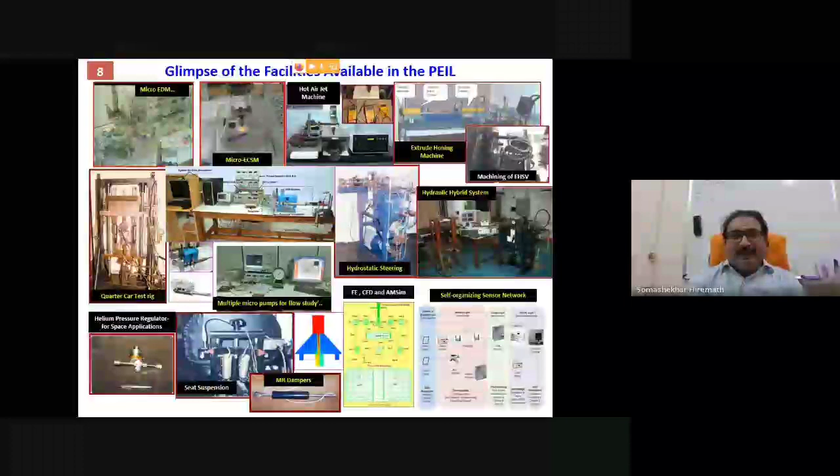All are developed in-house to do various machining processes, like the micro-EDM setup used for generating micro holes, channels, textures, and many things, including nanoparticles. These are all our patented work, friends. Everything I am showing is our patented work, developed in our laboratory to do the various work.

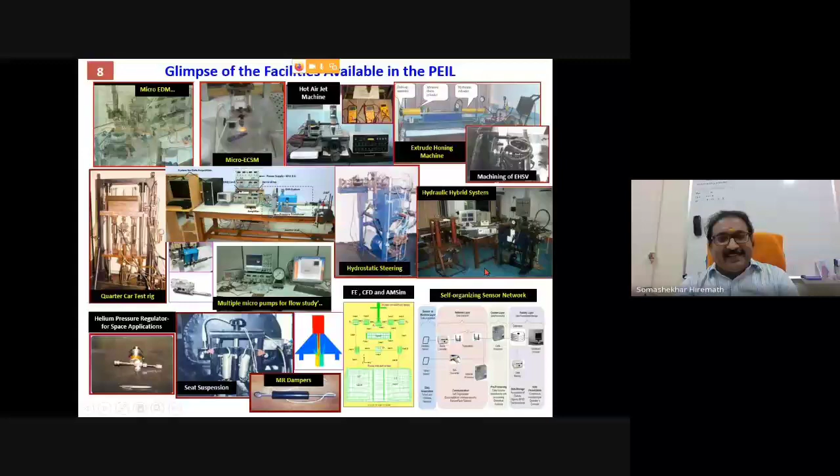Then I will concentrate quickly on the R&D facilities available in our laboratory. The first self-guided vehicle, HARINI, is developed in our laboratory and used for various exploration purposes.

Now, for the past 4-5 years, we have been working on the parallel manipulator also. This is a joint which can mount the table in any direction. This is a patented work - only the joints are patented.

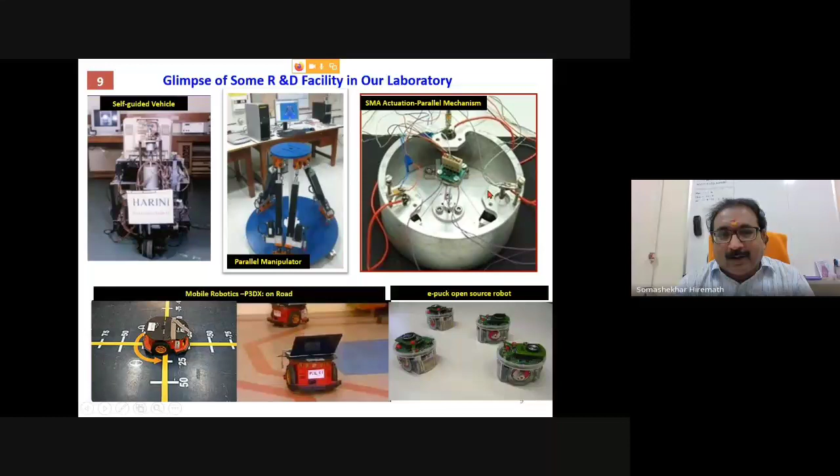All these are the actuators. I'll show you the animation later at the end of the presentation. The same parallel manipulator is replaced with what we call SMA actuated wires, placed in all 6 locations. If you heat and cool these wires, the table will be mounted in different fashions.

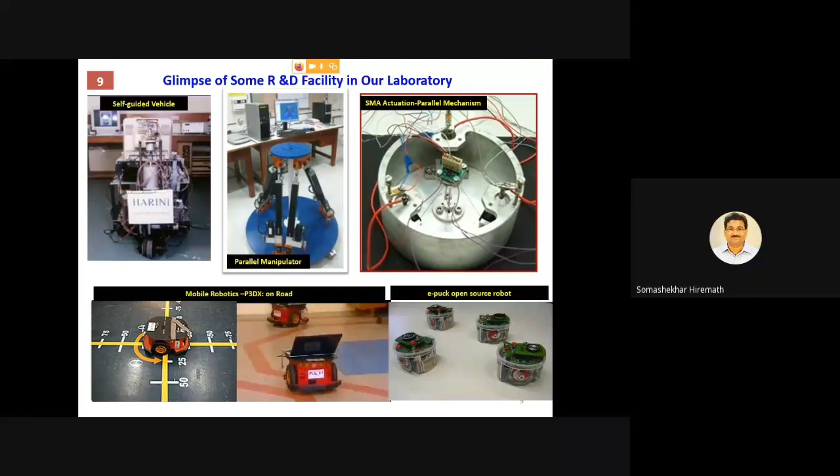The next area where we are working is mobile robotics. Here we are using the P3DX robots on road for collaborative robots, obstacle avoidance, and many applications, including very small robots like e-puck robots.

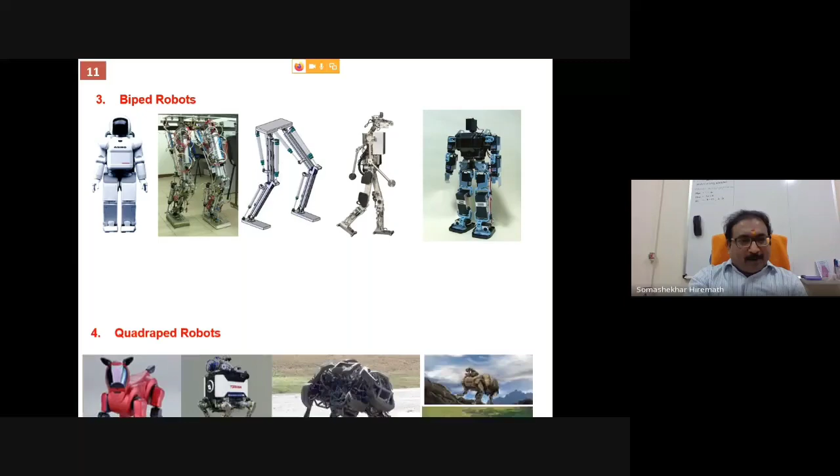There are many things available in our laboratory to carry out research work. Khepera robots, Pioneer robots, biped robots, quadruped robots, and hexapod robots are some of the things available in our laboratory for research. All are programmable and reprogrammable devices used for developing a controller or any specific work.

Now, one more facility you are seeing is what I call the workspace calibration test facility, only available in a technical institution at IIT Madras. This is an 80 lakh project, friends, where we are calibrating industrial robots, medical robots, and mobile robots.

This is a FARO laser tracker. It will emit the laser and you will see the laser rays. This will be traced by the retroreflectors. A small ball is there, and different types of balls are available here. This is called a retroreflector, which you attach to the industrial manipulator or medical robot you want to calibrate, to determine all the ISO parameters.

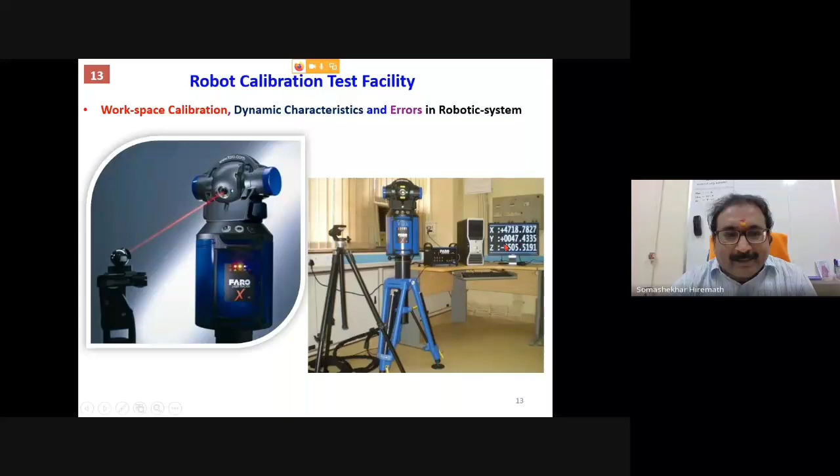I'll show you in the next slide. You will see the FARO laser is interfaced with the DynaCal software, which gives the accuracy in X direction, Y direction, Z direction, theta X, theta Y, theta Z - all the parameters you are able to calibrate and use for various purposes. We calibrate parameters like positional accuracy, positional repeatability, and distance accuracy, as specified in ISO 9283/1998.

All these are online measurements using the software, which also follows the ISO parameters. We do online measurement and offline measurements, many things using this on the industrial robot. I'll show you how we are calibrating the robots at the end of my presentation.

Now we'll see some glimpses of the robotics work we did last year. First and foremost, what we are working on is trajectory tracking. It is so accurate, giving 2 or 3 decimal accuracy to trace circular, triangular, rectangular, or any known trajectory. You will see we are doing simulation as well as experimentation using differential drive robots, the P3DX robots.

In this work, we are using a very small one - a 1.2 lakh differential drive robot, programmable and reprogrammable, controlled through Wi-Fi with no wire connection. It is used to create different trajectories using a user-friendly graphical user interface. You'll see here your task is to get various types of trajectories, which are tracked automatically using simulation in MATLAB, integrated with experimentation.

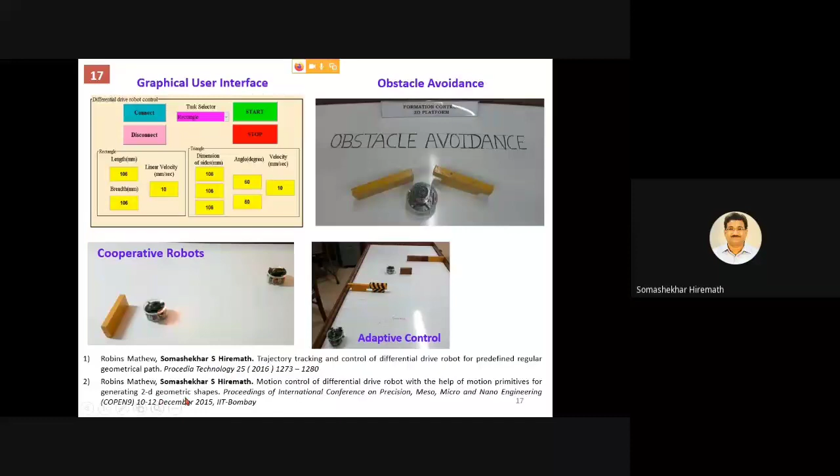Next, we are working now on the waypoint navigation system, used in aerial robotics, underwater robotics, and many other domains. The advantage of waypoint navigation is that it uses a probabilistic roadmap to generate small points, called waypoints. These waypoints are generated using the probabilistic roadmap, and then you define the initial point and final point.

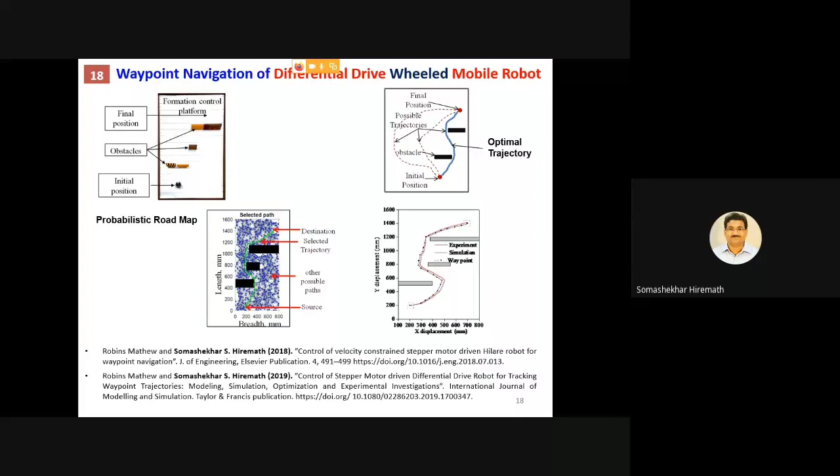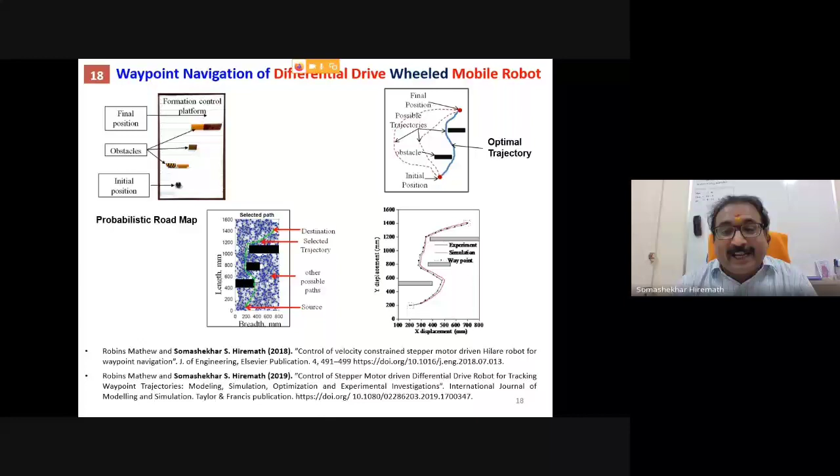The robot will try all the paths to reach the destination, avoiding the obstacles. In this waypoint navigation, our objective is to get the optimal trajectory, and then we do the experimentation. You will see the experimentation and simulation results, showing how the robot reaches the destination point with minimum time and minimum distance to achieve the target value. These results are also published in good journal papers, each about 20 to 25 pages, elaborating the complete dynamics and kinematics. Next, we are very good in developing image processing techniques.

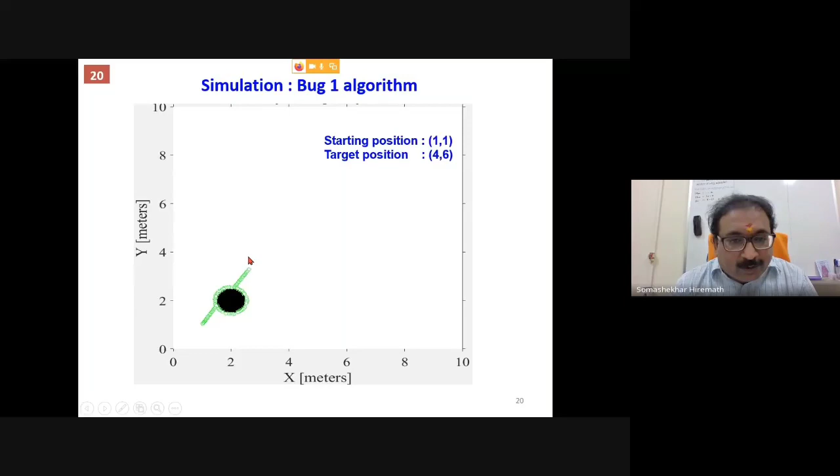At every instant of time, it calculates the distance between each point and the destination. Then what happens next? Other robots coming will not circumnavigate; they will only go toward the minimum distance to the destination.

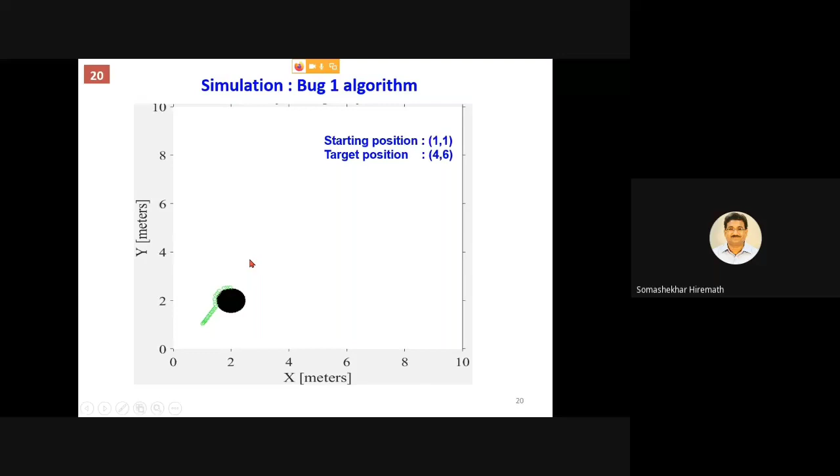For this, we use a multi-robot system. There are many robots, robot 1, robot 2, robot 3, robot 4, all placed in their original positions. Then they start moving all at a time. The robot nearest to the obstacle will circumnavigate in the clockwise direction, and another robot will move in the anti-clockwise direction.

Every time, the robots exchange data, such as how much distance remains to the destination and how much time to reach it. Then the robots exchange information and decide the minimum distance traveled to the destination, and determine the point to start from. Other robots that stopped here wait, and only two robots perform the circumnavigation.

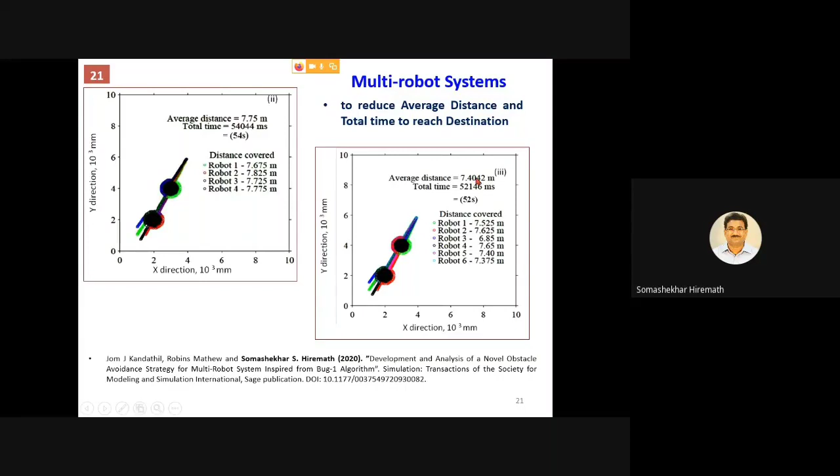Then the other robots come to that decided point and proceed. You will see that the distance traveled and total time taken decreases as the number of robots increases. The objective is to reduce the average distance and the total time to reach the destination.

We are also working on advanced technologies like reinforcement learning technique and goal-seeking technology for avoiding obstacles. In reinforcement learning, the robot learns by itself to reach the destination while avoiding obstacles.

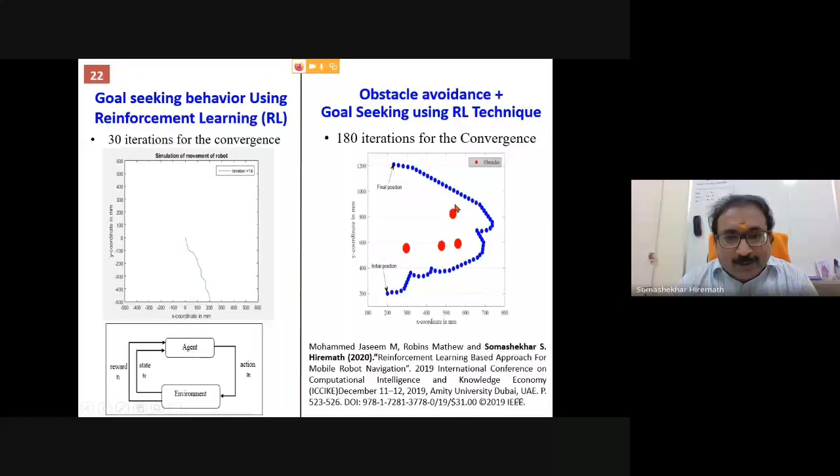This works on what I will call profit and loss. When the robot moves towards the destination, it gets positive rewards. If the robot moves away from the destination, it gets negative rewards. Every iteration, the robot is trying to get more rewards, meaning it is trying to reach the destination, using algorithms built into the system. In one example, from starting point to destination, it does 180 iterations for convergence to determine the final path, avoiding all obstacles. This is one area where people are working on obstacle avoidance and destination reaching.

One more thing our people are working on is an autonomous lake cleaning intelligent mobile robot system. On the lake surface there is so much wastage - papers, bottles, plastic bottles, metal pieces. We have developed a system to clean the lake using drones. The drone moves over the lake surface, having cameras and software to identify different types of wastage. It segregates and gives information to the lake cleaning robot, which goes and collects the waste and comes back to the destination. These are socially relevant projects we are doing to help people.

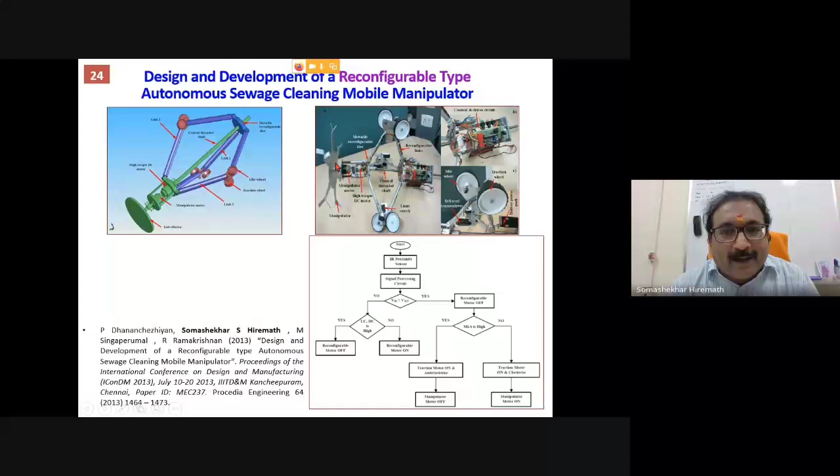The front side has a cutter. When it encounters obstacles, it starts rotating - the cutter starts, you will see the experimental part here. It starts rotating and crushes the things. Then it has a pumping system - water is pumped and it cleanses the sewers.

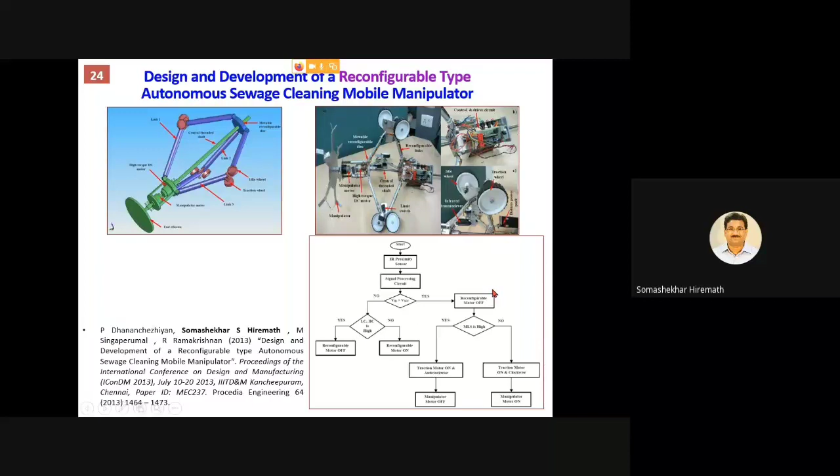There are so many algorithms we are developing to optimize these things, and many papers are there too. These are some of the socially relevant projects working on robotics.

Other things I haven't covered, friends - micro machining area has plenty of work going on, fluid power system has a lot of work going on. But these are the things where we are working on robotics, path planning, control, dynamics, using advanced technology like reinforcement learning and virtual reality. I will show you the videos at the end of my presentation.

In the robotics area, if you ask me what the research challenges are, the development of microelectronics and embedded computation has already made it possible to design systems that combine both mobility and autonomy. Many things are available now due to developments in microelectronics and embedded systems - so many sensors and actuators are available cheaply to automate systems.

Now there are 4 major research challenges that have dominated this development, and you have to concentrate more on these areas. People are thinking to develop intelligent robot systems for various applications. Mechanism and mobility is one area people are working on more - you have to develop the robot with a minimal number of joints and minimal number of drives, and mobility, meaning how this robot will follow structured and unstructured environments.

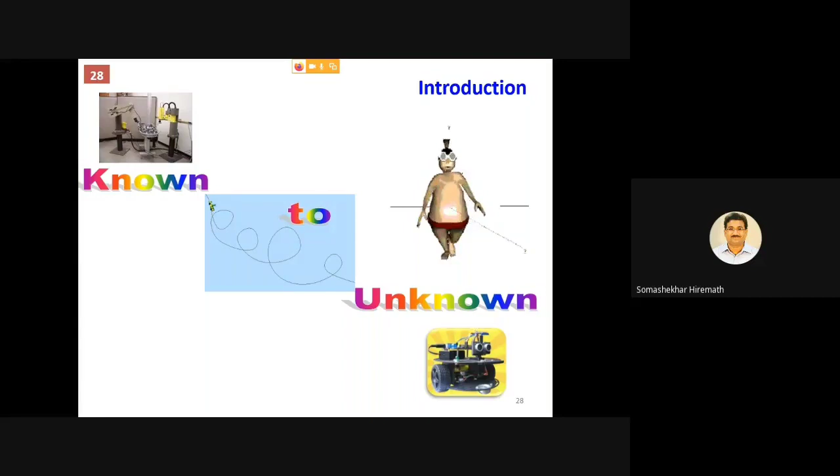Let us begin. As we know already, friends, the word robot is of Slavic origin, and it was derived from the Czech language 'robota'. It is an executive labor or forced labor to work where people cannot work. I will tell you where people cannot work - that is the objective of the robot.

Why he created it, we'll see later. Now we'll see the Encyclopedia Britannica definition: robot is an instrumented mechanism used in science and industry to take the place of human beings. It may or may not resemble the human, but it performs the task in a human way - how a human uses hands to bring or move an object, it will do. This is according to the Encyclopedia Britannica definition of robot.

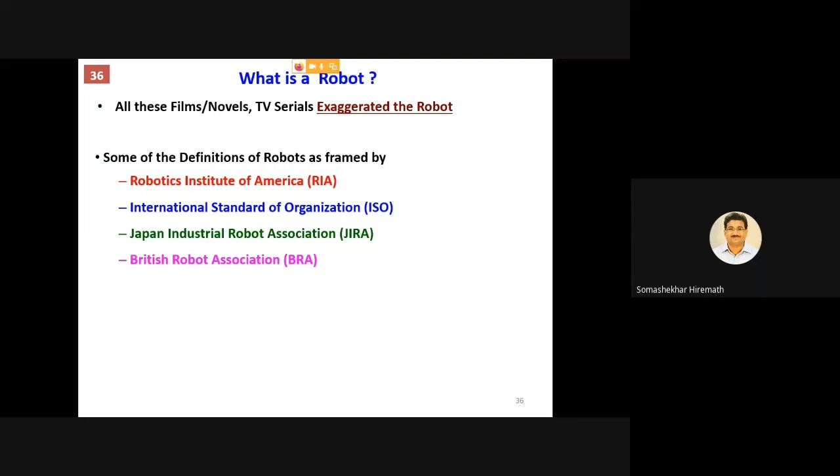Also, remember all these definitions have two important common points. You will read this from the book, I will not go through these definitions in detail. Reprogrammability is there, and multifunctionality is there in all these definitions. These are the two common things you will see in all the definitions.

Then, friends, an industrial robot is a general purpose, programmable and reprogrammable machine or manipulator, having anthropomorphic characteristics. What is anthropomorphic characteristic? Only the arm. Your hand is there, no? Only arm.

Then programmability is there too, correct? Arm plus programmability, ideally suited for various applications in industry. Variety of tasks this arm and programmability will do. Some of the material handling applications are there.

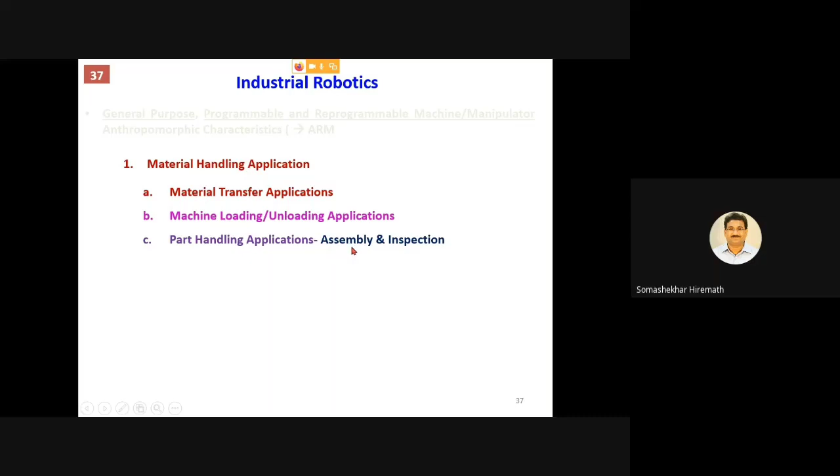You come across material transfer application, an indirect application - meaning robots will not come in contact with the working machines. Machine loading and unloading application, where robots will directly come in contact with the machines. The part handling application, assembly and inspection, again these are indirect applications where robots will not come into the operating machines.

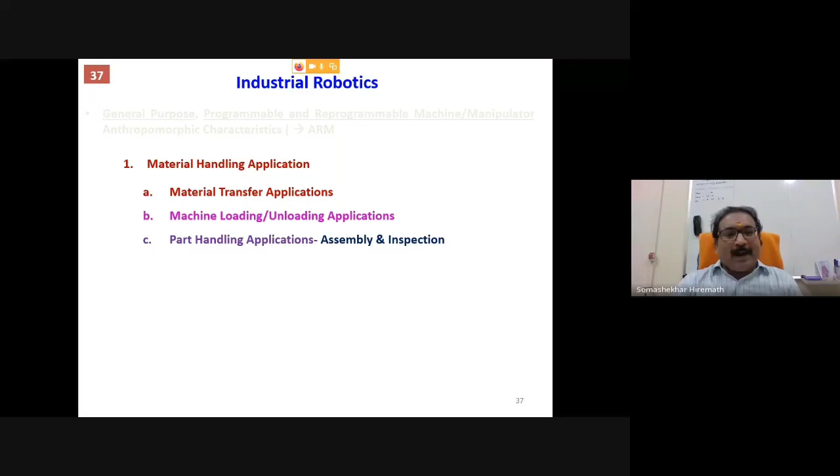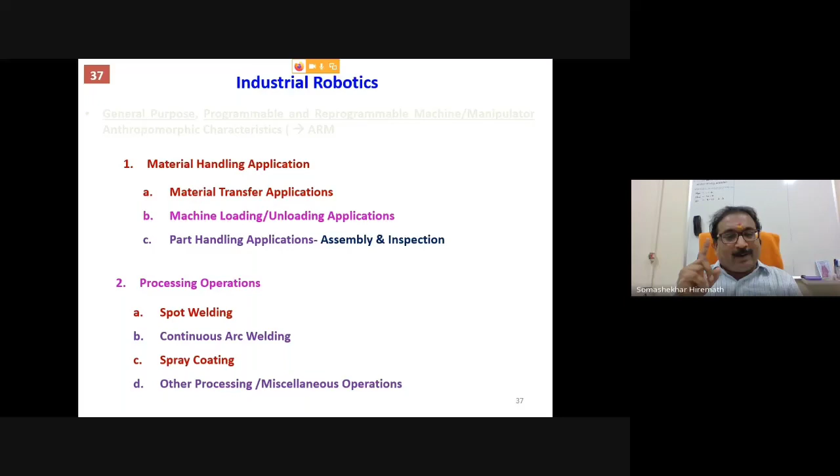Apart from this, friends, the processing operations are there. They will do spot welding, continuous arc welding, spray coating, and other processing operations including drilling, grinding, polishing, deburring, wire brushing, riveting, laser drilling - whatever you will name, all these operations robots will do in the second category of operations.

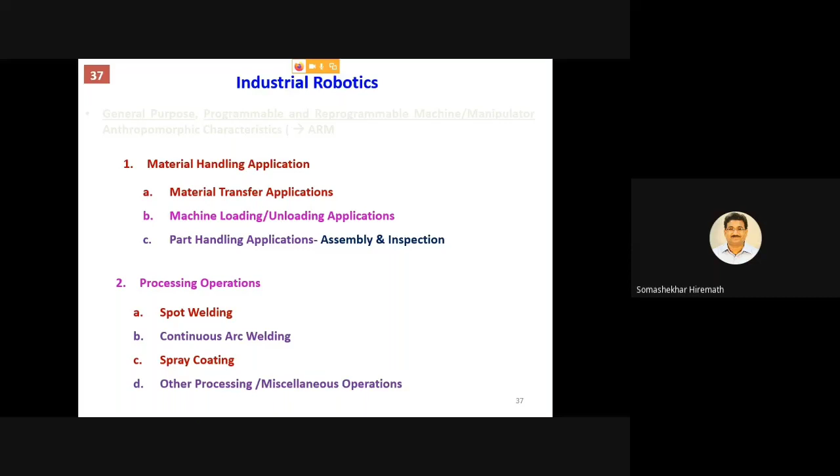All these operations, whether material handling or processing, will be done with high endurance, high precision, and high speed. Only then are robots used, otherwise no. All robots should work with high endurance, high precision, and high speed.

Quickly, I will show you some typical applications. The robot will handle parts from very big to very small. It is equipped with so many sensors to pick a silicon wafer, even a 100 micron wafer, up to huge machine parts. The robots are designed for this.

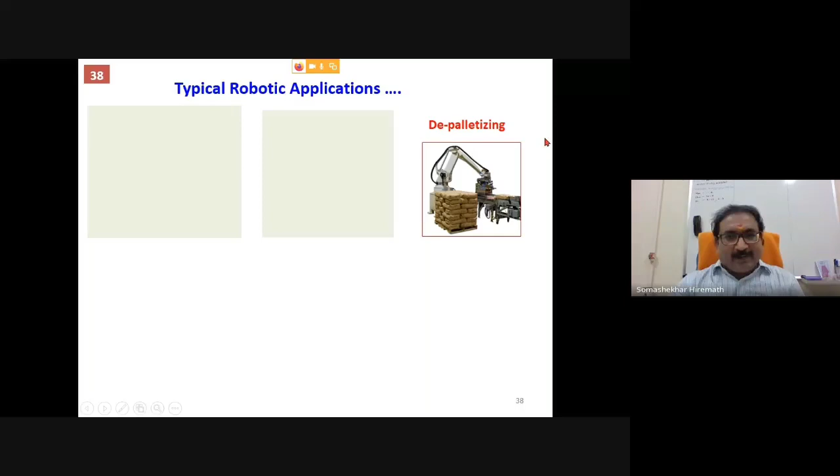Then there's the palletizing operation. Look here on the conveyor, the milk bags are moving. The robot will pick and load them to the container, or vice versa, taking from the carton and loading to the machine. This is what we call depalletizing. Similarly, there's machine loading and unloading.

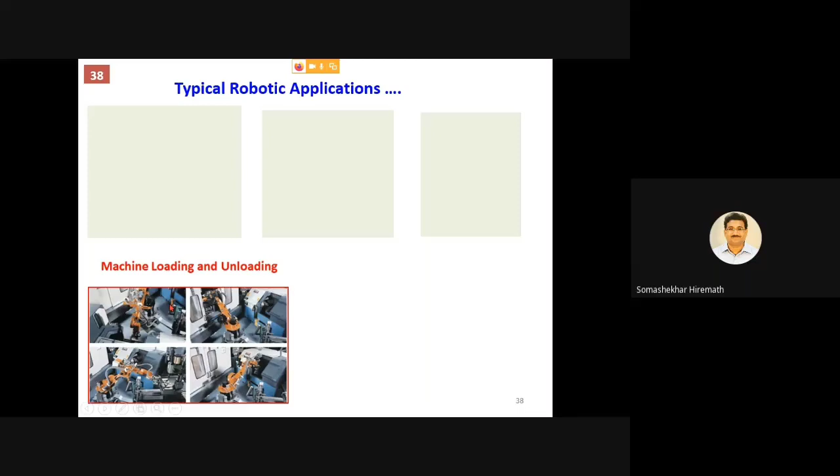One robot setup is called a work cell. What is a work cell? It's a robot working with various machines, 2-3 machines at a time. For example, in casting robots, one robot is pouring while another robot is picking the part. All of this happens simultaneously in coordination within the work cell.

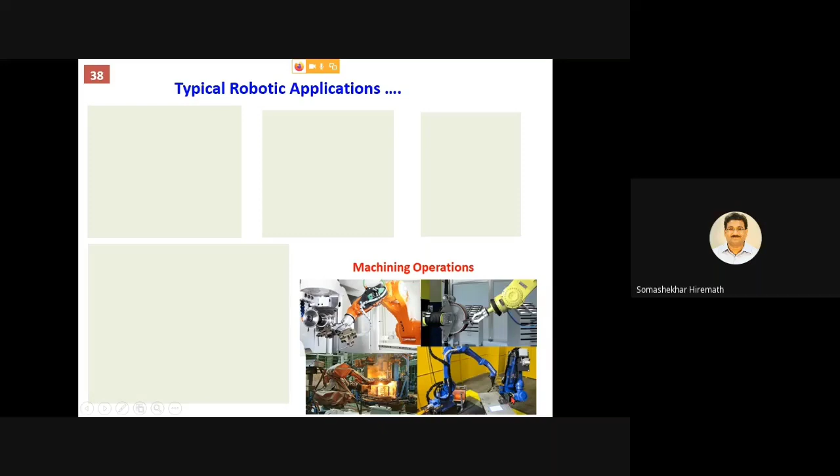Also, there's the machining operation - you will see how robots perform grinding, drilling, and many other operations. Then there are cooperative robots too. Look here, one robot holds the workpiece while another robot does the machining. This is what we call collaborative robots in machining operations.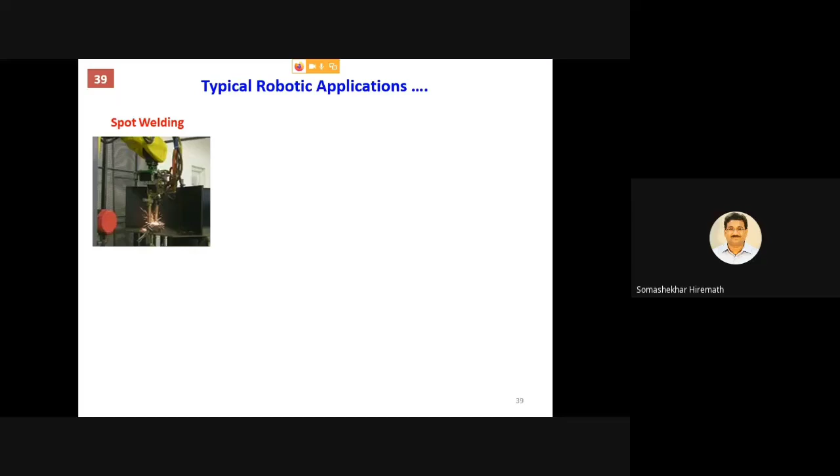You will also see spot welding, seam welding, spray painting, assembly operation, and inspection. Whatever is left out, you can list it out yourself. Various applications use robots.

Now I'll quickly tell you some statistics about where robots are used more in industry. Material handling - pick and place, palletizing, depalletizing, machine loading and unloading - accounts for 25% of robot use. Next is welding, spot or arc welding. Painting comes next. You'll see other operations have a much lower percentage of robot use. Material handling is of prime importance in industry, followed by welding, then spray painting.

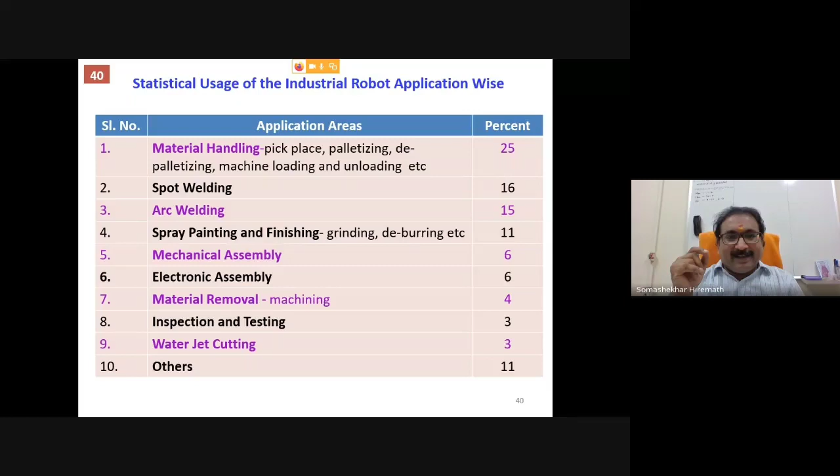Why are robots used for these purposes? People find it very difficult to handle certain work parts. That's when you have to use robots - where human health hazards like cancer or breathing trouble, bronchitis, are more prone to occur. There are many such reasons. Why robots are used only for these purposes and not others, you will see later.

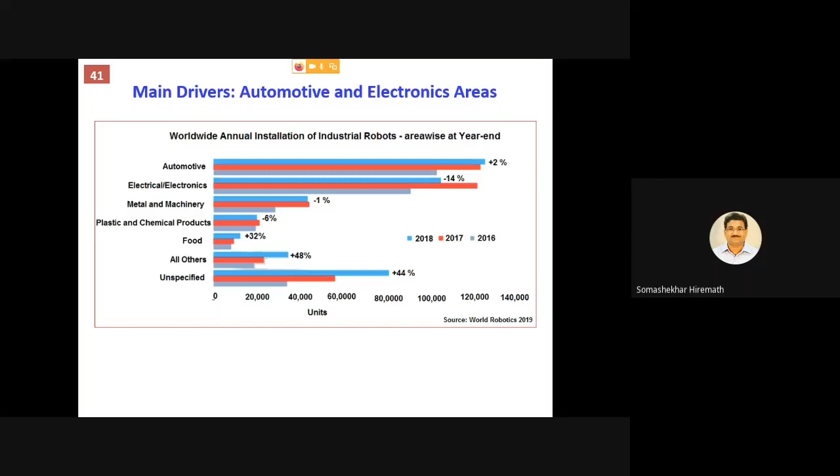Now we'll see the main industries where these robots are used. Automotive industry takes the major share of robot use, followed by electronics. The remaining applications, like food industry and others, fall under different categories.

Now we'll see the global estimates from the IFR, World Robotics Association. For 2021, the forecasted expectation is 630,000 units, in thousands. You will see from 2015 to 2021, it is always a rising trend.

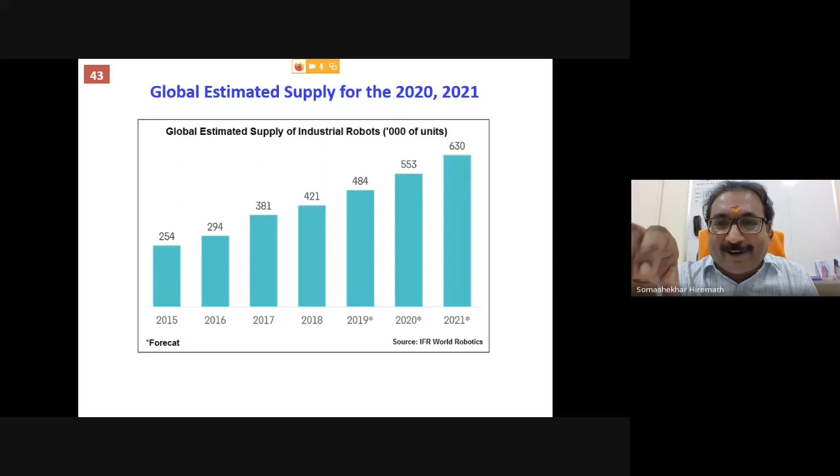Why is this? Robots are multi-purpose, reprogrammable robots used for countless applications. The only anthropomorphic characteristic is the arm. If you connect a welding tool to the arm, it's called a welding robot. If you connect a spray gun, it's called a coating robot. If you connect a drill to the same arm, it's a drilling robot. So, only anthropomorphic characteristics and reprogrammability allow the robot to be used for numerous applications. That's why there's a rising trend - robots are increasingly in demand.

As I have told you, when will you use a robot? This question may be there in all people's minds. Only in these cases you'll use the robot. Otherwise, robots are not required, friends.

One is what we call hazardous or uncomfortable working conditions. This is where hot forging, die casting, spray painting, foundry operation, soldering of electronic circuits - you will see human health hazards are more in these operations. Then you will use a robot. Industrial robots, where there is a hazardous or uncomfortable working environment, use it.

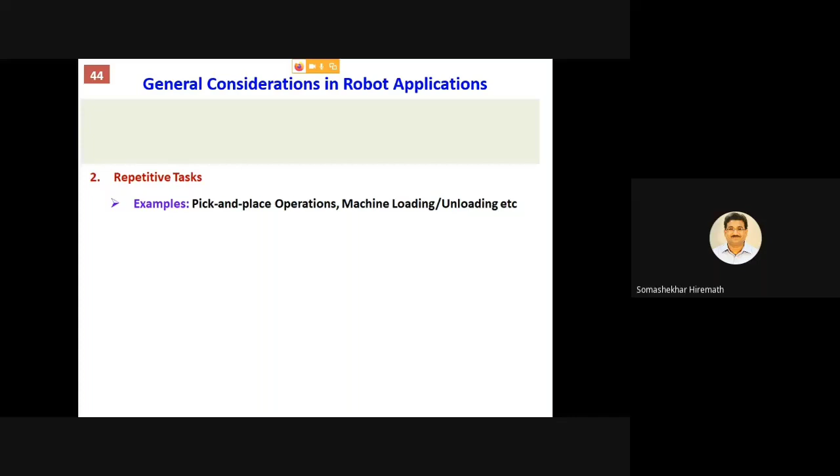Then repetitive task. For example, pick and place is a repetitive task. Machine loading and unloading is a repetitive task. Such work people cannot do. It is monotonous. Monotonous work they don't want. They want only challenging tasks. Every hour the work has to change, then only will they work. If you give pick and place, morning he will pick and place 10 objects, evening he will place only 5 or he will sleep. Such type of work you don't give to humans. Only you will use the robots.

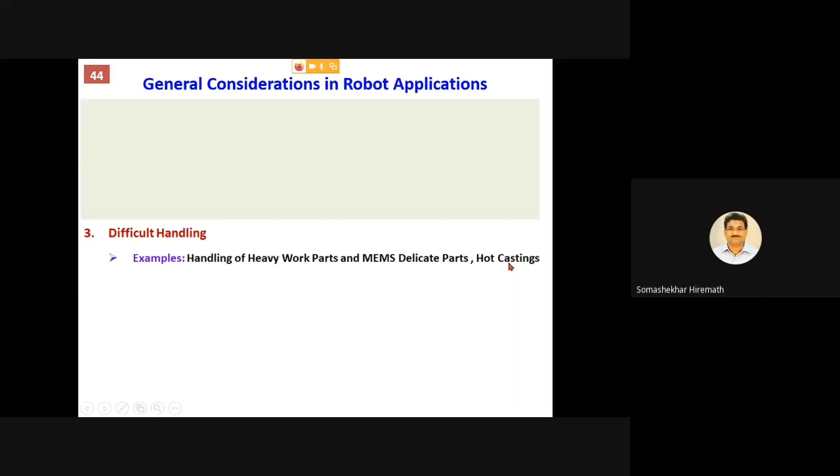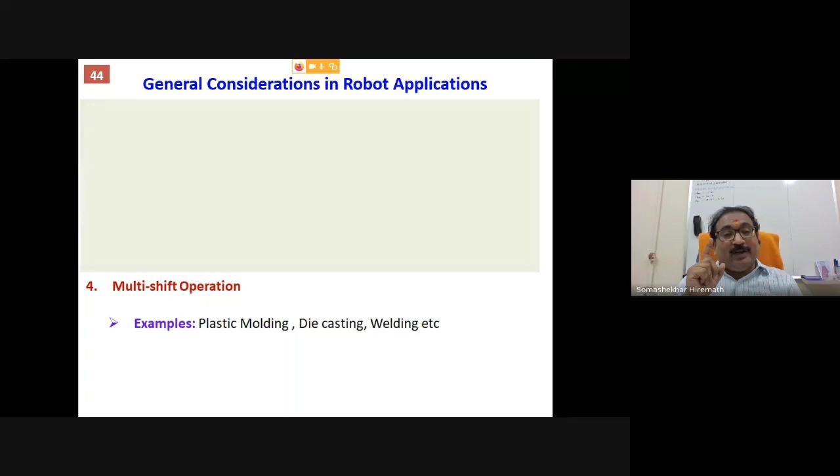Also difficult handling - the handling of heavy parts, or MEMS delicate parts, or hot castings - only robots are best suited for difficult handling work. And also multi-shift operation, this is what I call a labor saving important thing. If your industry is working 3-4 shifts, it is difficult for people to work. For example, some industries like plastic molding, die casting, welding - these operations can be done continuously on the moving object. That time robot is best.

But remember, friends, selecting the robot for the right application is very important. If you see, while selecting and designing the robot for any operation or application, keep in mind the laws of robotics.

Meaning what it is, friends, the robot will do all the work that humans can do. It will replace more than 15 or 20 people also, but again, control is with human beings. What robotic technology will do is reduce us from blue collar workers to white collar workers. You have to accommodate to newer technology like artificial intelligence, machine learning, deep learning, data analytics. You'll convert yourself from manual work, mechanical work - then only will you survive in future industries.

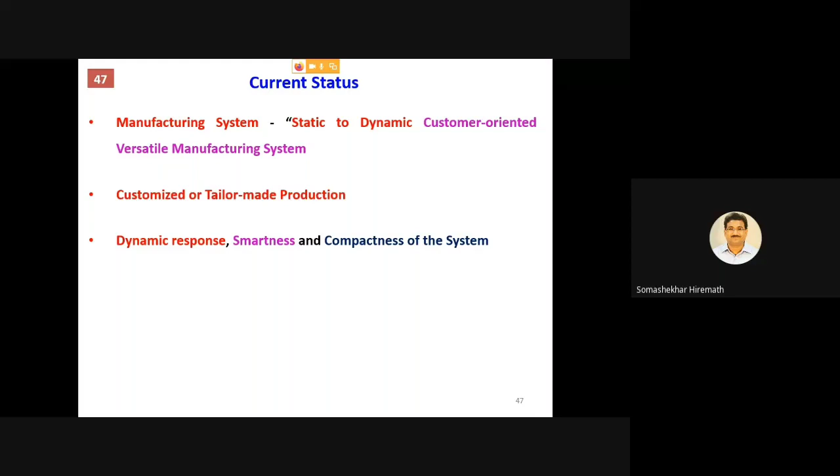How? Because the availability of powerful processors are there, in terms of density and speed. You'll see what is going on currently, friends. Digital transformation is taking place, which is the need of the hour, and we have to accept, adapt, and race to the digital age.

Digital age means what, friends? Now what I'm doing is bringing software components more and more into mechanical integration. Meaning, products are changing from pure mechanical, pure electrical, pure electronics, or pure computing to mechatronic oriented industry. One or the other day, you will find it difficult to get a pure mechanical product or a pure electronic product. All are converging to mechatronic products. For example, if you go to any supermarket, you come across many things, friends,

where IoT is playing a major role. Auto scanning is there, smart tags on the product, CCTV cameras, cash register, card swiping for any application. One mobile is there, you would use Paytm, Google Pay, PhonePe, Apple Pay, Samsung Pay, and many features you have to use. All are connected through internet. And ATMs are there, I don't need to tell you how they give all information sitting in one place.

How fast it is. If you ask for 1,000 rupees, only 1,000 rupees will come, not 1 rupee extra. How will they work, you will see. All machines are so precise and so follow instructions through internet. All of this is going on currently.

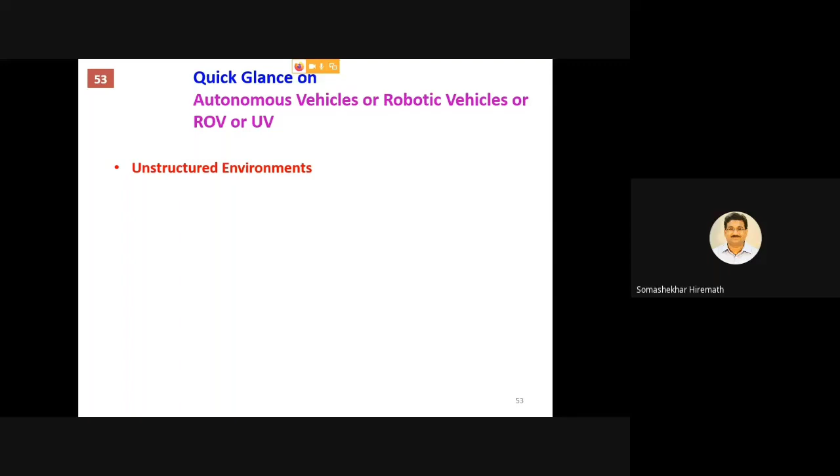What is this meaning? It requires more number of sensors and actuator integration, and human intelligence is embedded in the machine. That is the thing going on. Meaning I am mimicking how I behave when a problem occurs, the same way robots will do when working in the unstructured environment. For this, many things are required.

High degree of autonomy you have to give to the robots. Computational intelligence is powerful. Ability to carry out tasks that are unachievable otherwise. Meaning that's why I called it: artificial intelligence is embedding human intelligence, working far beyond human intelligence. That is the one thing going on now.

Now we'll see these robots move by itself, meaning autonomously, based on the situation. And as I have told you, no humans are there on board in these vehicles. This is called a robotic vehicle. Please remember, friends, robotics are categorized into two types now.

One is what we call industrial robots. Industrial robots means fixed platforms, they will not move from one place to another. Another one is robotic vehicles. They have moving parts, meaning robotic wheels are there, flapping wings are there. How is this there? We are mimicking insects and biological things in robotic vehicles, or also borrowing the mobility from our road transport and all these things.

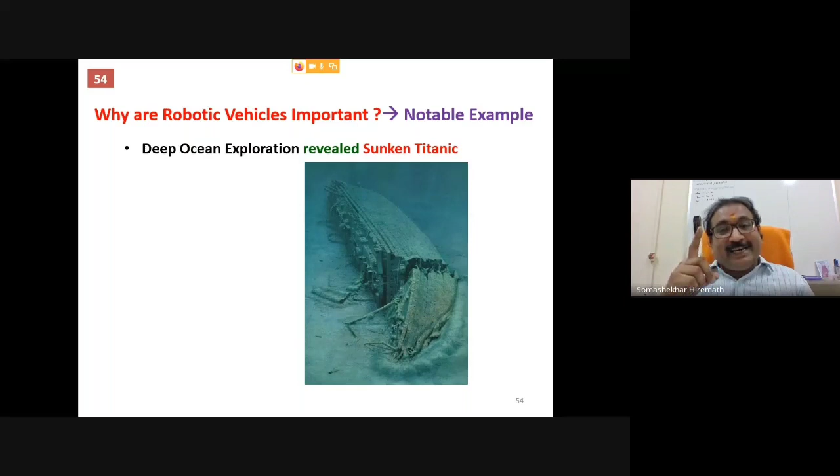Now you may ask why these robotic vehicles. I'll tell you some notable examples of why robotic vehicles are so important. When the US performed deep ocean exploration, they found the sunken Titanic. The US made the deep ocean exploration using a mobile robot. They revealed the sunken Titanic is there on the seabed, as you see in so many movies and all these things. It is detected due to ocean exploration by the ROV.

You may ask where and why robotic vehicles. There are many reasons. Friends, the first class of robotic applications is similar to previous, where people cannot go and where human hazards are more. For example, space exploration, undersea world, nuclear and biological contamination, military operations, security and defense systems. Where such things are there, this first class of robotic applications will come into picture.

Next is the second class of robotic application: routine work, where machine mobility can effectively replace direct human work. For example, large scale agriculture requires machines to cultivate, seed, irrigate and harvest very large terrains. That time you'll use robots in agriculture. Mining haul trucks, insect killing machines, environmental monitoring systems, also large manufacturing systems to transport components and subsystems. For example, I use ROVs in industry to transport parts, using remotely operated vehicles that have so much human intelligence embedded.

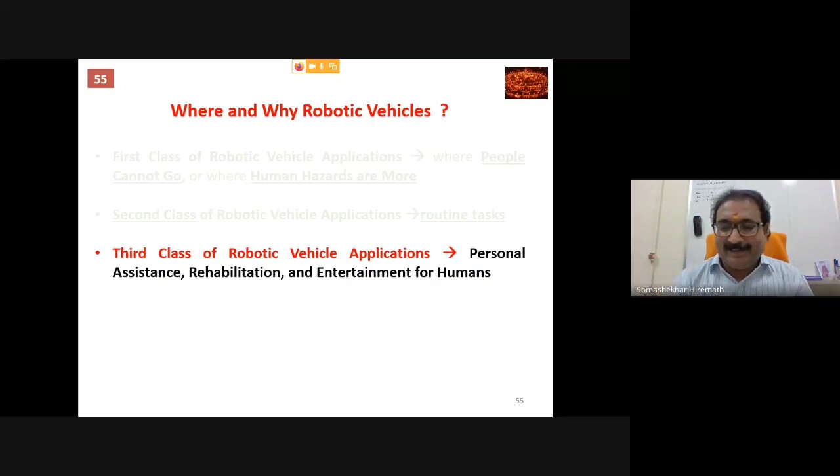Correct? Similar to before, the laws of robotics remain the same, but here, friends, the first one is a fully autonomous robot has the ability to gain information about the environment, meaning how many sensors are required, you will see. Also, the robot will predict its own significance, for example, whether power is there or not, power is required or not, self-diagnostics it has to do.

An exteroceptive sensor and a proprioceptive sensor are required in the robot to gain information. Also, it should work for an extended period of time without human intervention - meaning battery power, moving technology, all must be considered for extended operation. It should move all or part of itself throughout its operating environment without human assistance, and avoid situations harmful to people, property, or itself, unless those parts are defined in the design.

But remember, friends, the robotic vehicle also requires regular maintenance. In NIOT, the National Institute of Ocean Technology, after ocean exploration of 6 months or 1 year, the robot requires a minimum of 6 months regular maintenance. That is important to give importance to for autonomous robots.

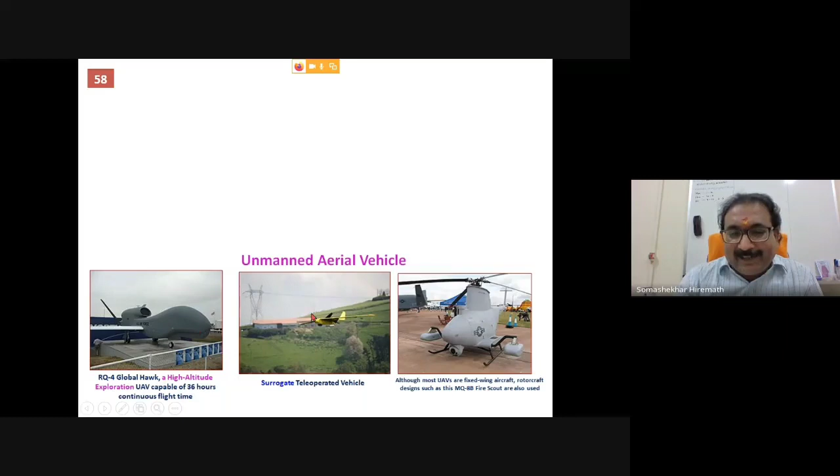Then unmanned aerial vehicles - there are various types of designs, including what we call high altitude exploration UAVs, which can work for 36 hours. Each has different capability to do its operation in the area. Also, you will see unmanned micro air vehicles used again for exploration and many other purposes.

The underwater vehicles open a new era in exploration, because humans may dive to a depth of 100 meters or even slightly more, but pressure, light, current, and other factors limit human exploration in the ocean. That's where you use unmanned vehicles. They go inside the sea to 3,000, 4,000, 5,000 meters. Exploration begins - they collect samples, sand, everything, bring it to the top, and analyze it, which is only possible with underwater vehicles.

Then the next very important area is surgical robotics. Surgical robots use a robotic cart, which has so many manipulators to handle various types of tools. The surgeon sits in one place and guides the robotic cart to do the operation.

In all foreign countries, and here also in Pune, Bombay, many people have robotic carts. They use the same robotic cart for heart surgery, kidney transplantation, eye surgery, orthopedics, urology, gynecology, and so on - the robot is used for various operations. The surgeon only guides the robotic cart to do the operation.

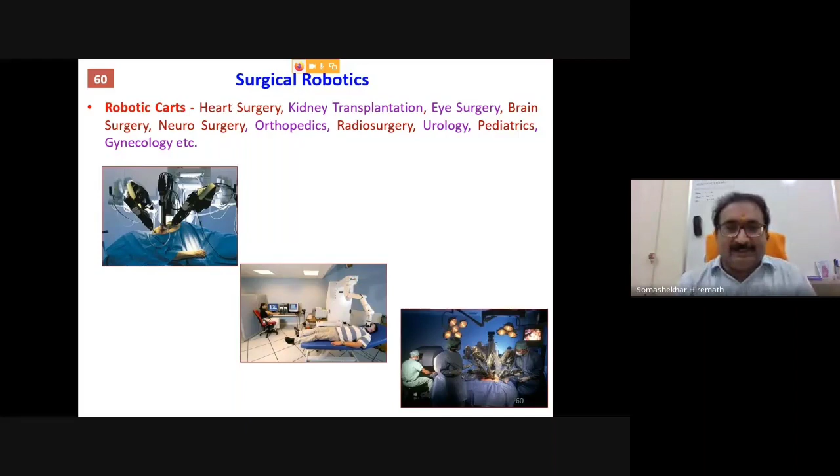The next area where people are working is swarm robotics - what we call a multi-robot system, like a swarm, similar to how ants work. The same swarm intelligence is borrowed and implemented in robotics. I'll show you some videos later.

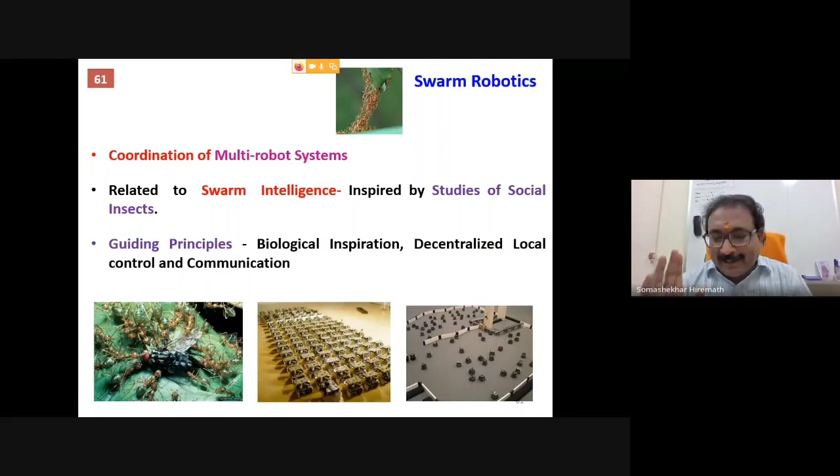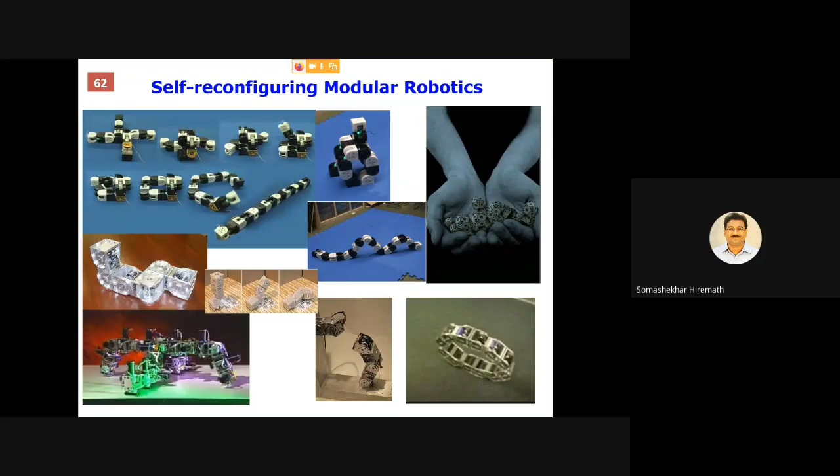Then another area is self-reconfigurable modular robotics. These robots undergo morphological change using what are called unit cells. The unit cells adjust themselves to do the work - they dismantle themselves and arrange themselves to do the work. I'll show you the video also at the end very quickly.

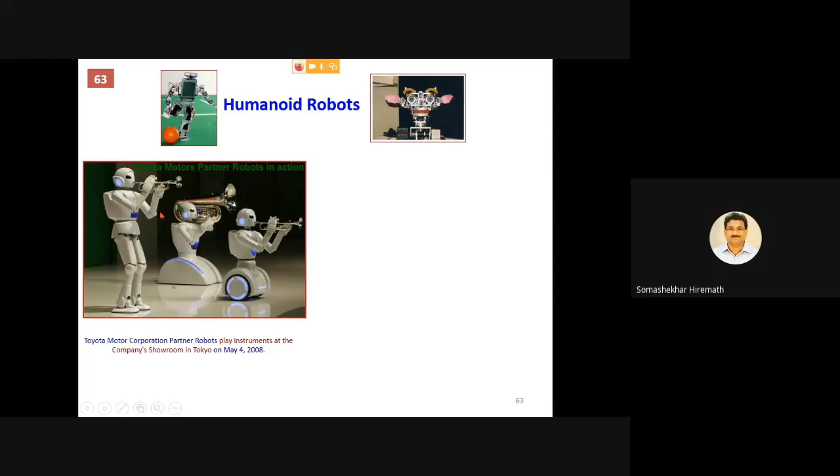Let's move quickly. Now, the humanoid robot is one of the areas where people are working more, especially Japanese researchers. As I've told you, Toyota developed robots that play various instruments. Also, Japan developed the My Spoon.

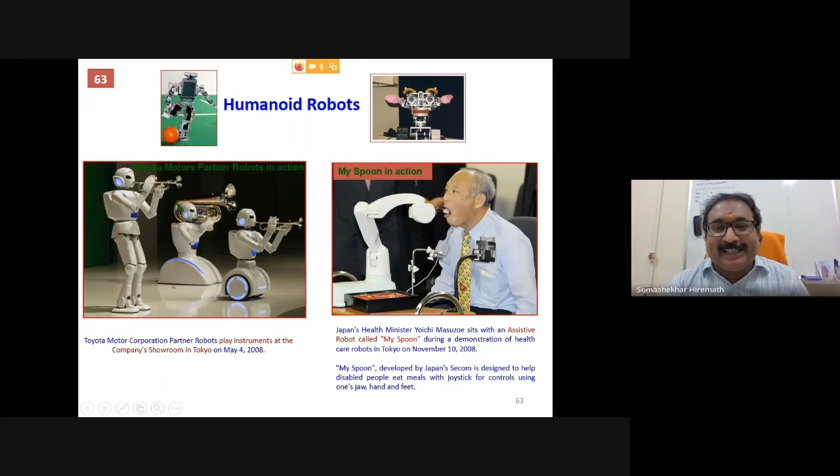Here you see the health minister, Yoichi Masuzoe. What he does is feeding - the robot takes the food, and when he opens his mouth, it feeds him, then goes to bring the next spoonful. This means the minister can do other work without wasting time on eating. This is My Spoon, developed by Japan.

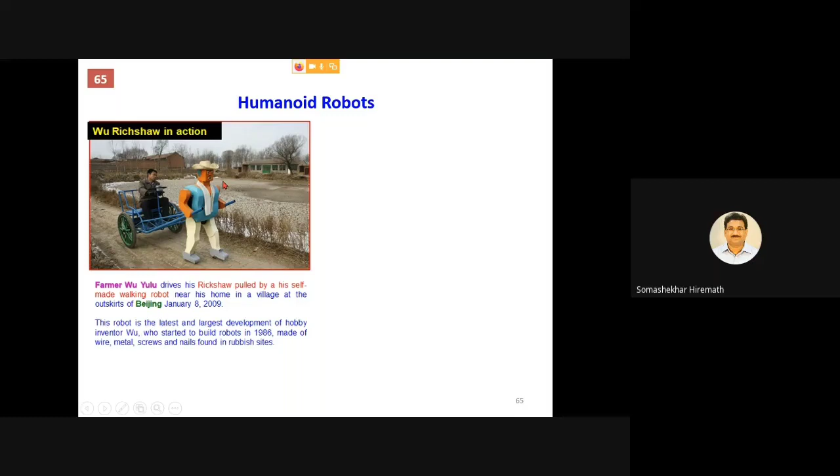Like this, there are many dynamic balancing robots. Also, you will see here, made in Beijing, the Wu Richshaw. This Wu is a farmer who developed his own robot to pick him up from home to farm and farm to home. See how a humanoid appearance is given. People are developing their own robots for various applications.

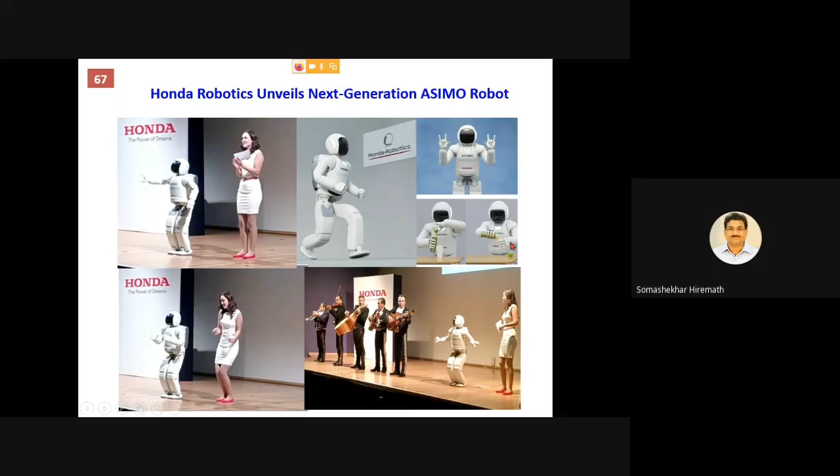Honda developed the amazing ASIMO robot. It will follow instructions, and when playing, it will dance for entertainment purposes. It will open the bottle and pour into another glass like this. ASIMO robot, correct, next generation robot.

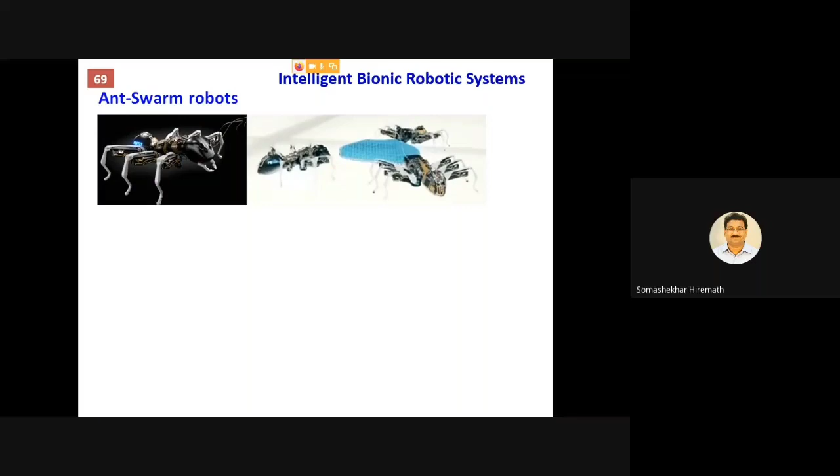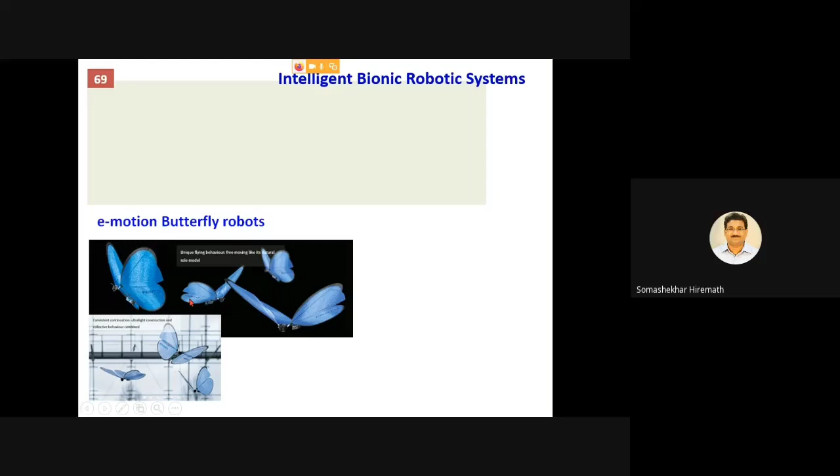Apart from this, you will see people have developed swarm intelligence, as I have told you, and the eMotion butterfly, Festo developed these butterflies. This is only to study the intelligence and behavior of butterflies. These are all created by Festo.

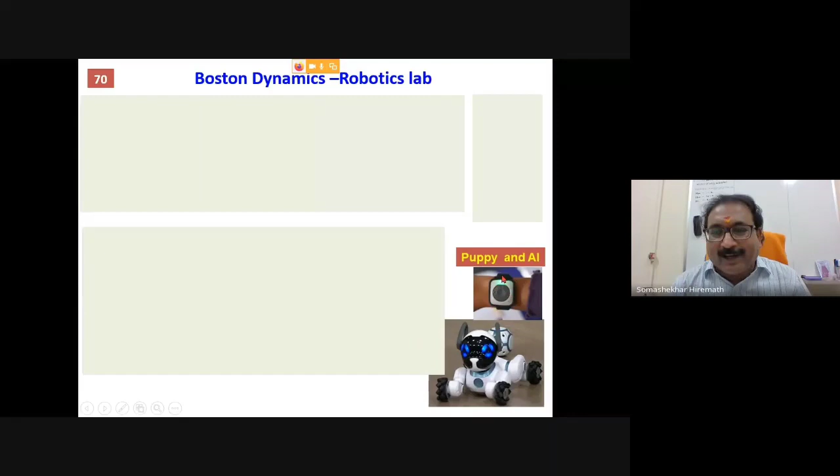Similarly, Flying Fox. Boston Dynamics laboratory developed the humanoid robot. You see, no head, it will do all the human operations. The dog, climbing robots and running, all study the biological inspiration in the kangaroo as well as dog. Puppy, you will see, is equipped with what I will call an artificial intelligence watch. It will control the robot - stop, move, turn - all through the artificial intelligence in the watch.

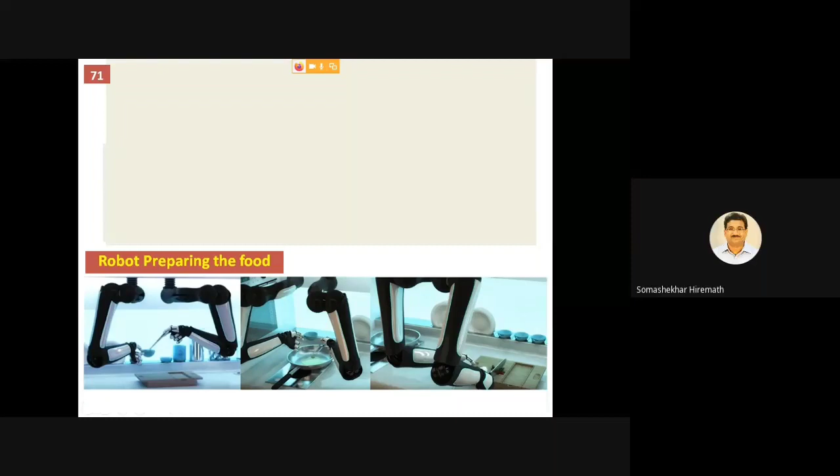Now you'll see many things happening in underwater robotics also - robot fish, robot sharks, spiders. Then robots preparing food in many hotels abroad. You will see these are gantry type robots hanging from rails. They will prepare the food you require, and then a supplier will take it and follow. All are programmed; they will do all operations continuously.

Then very quickly, I'll show you some amazing facts, friends, very quickly. First amazing fact, we already know that the word robot comes from the Czech language, robota, meaning executive labor, defined in 1921. Remember this, which is shown in Rossum's Universal Robot.

Fact 3 is that the first working robot used in the automotive industry for manufacturing cars was in 1961 itself.

Over the first 25 years, 61 robot-related injuries and deaths were reported in the US alone, friends. Then you'll think about how you will work with robots. The number of robots in use is more than millions, but most humanoid robots are used in Japan. The revenue expected in 2025 is 70 billion US dollars.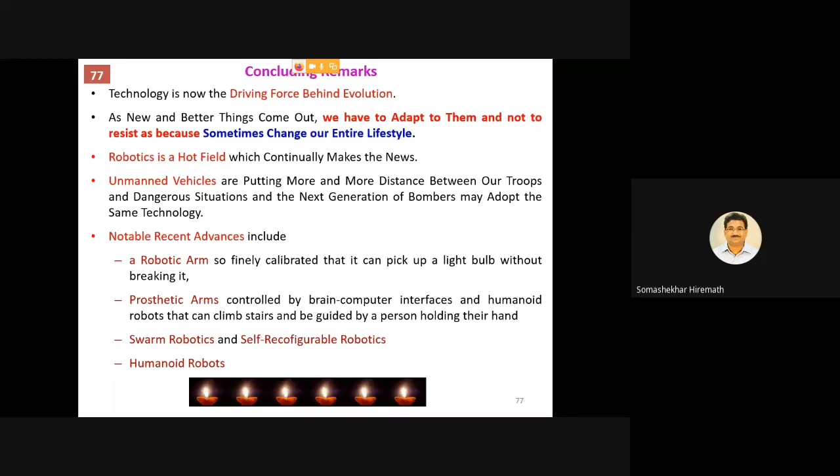So robotics is transforming the world faster than you can imagine. Think, there are some more application areas left out, friends — there's no limit for its application, the sky is the limit. Finally, I'll conclude quickly. Technology is now driving evolution, and there's no way but to adapt — don't resist, go along with newer technologies. Robotics is a hot field which continuously creates unmanned vehicles, putting our troops away from dangerous situations. The notable examples are prosthetic arms, swarm robots, self-reconfigurable robotics, and humanoid robots — meaning robots occupy every place in society, correct friends?

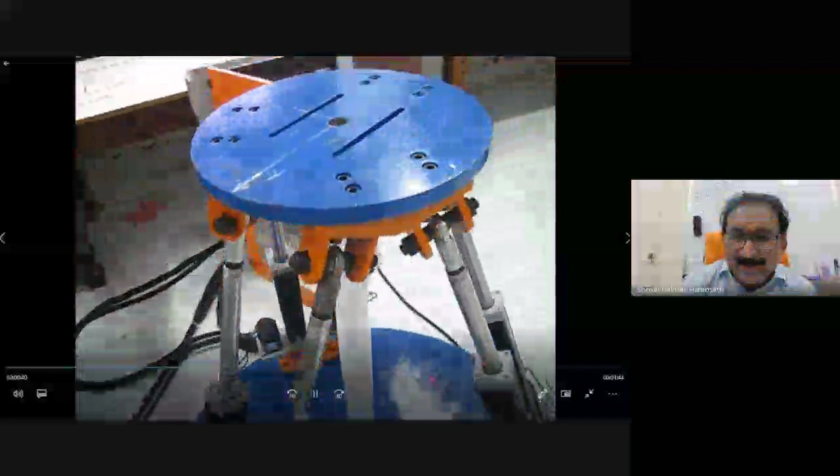Visible to all? Visible or not? Yes, sir. Yes, sir. It's visible, sir. Yes, It's visible. Yes.

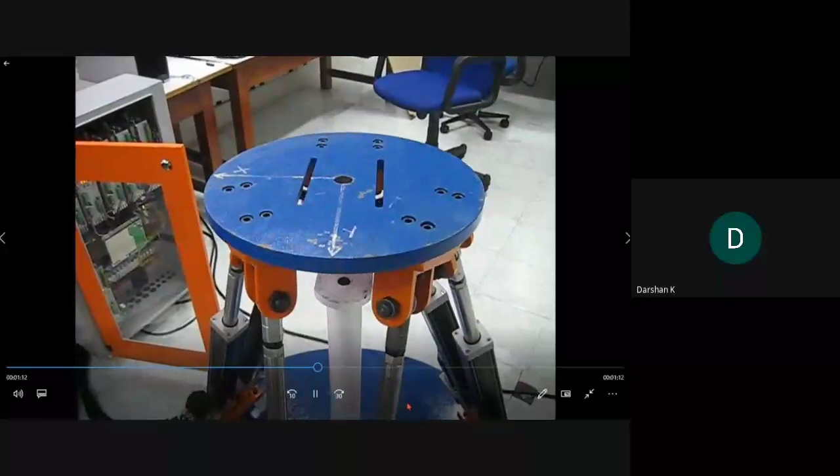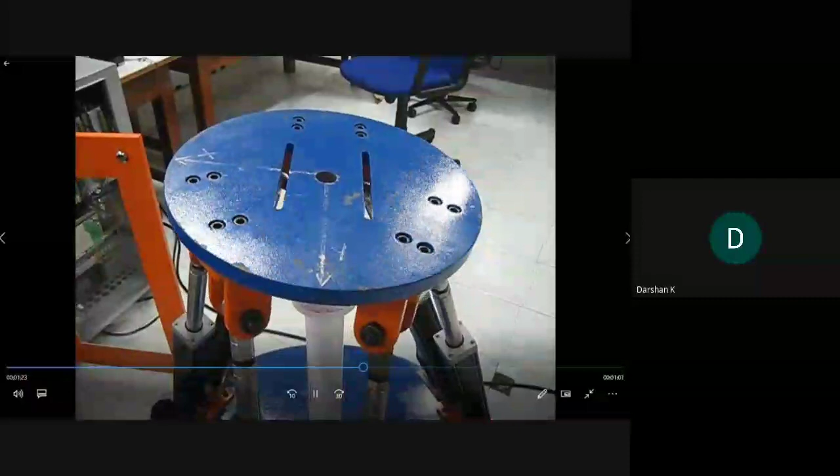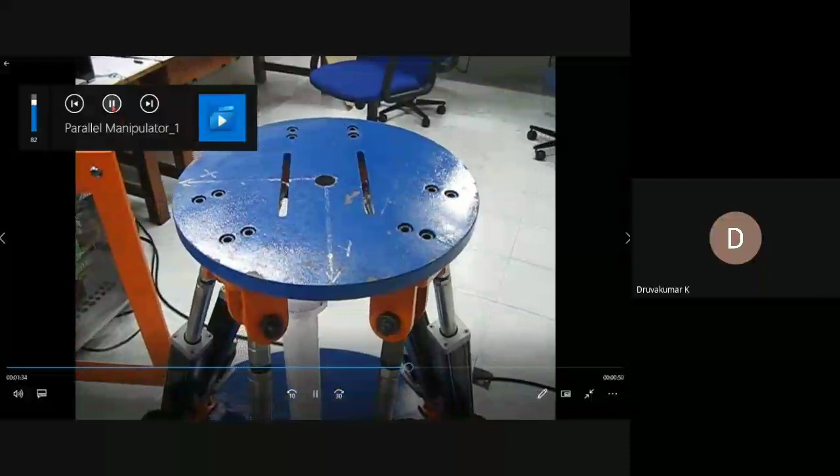Sir, Somashekhar, sir, sound is not coming, sir, in that one. Sound is not coming. Sir. Maybe that mic, the speaker is muted, sir. Yes. Okay, I'll show you next video. Then we'll. Not coming, No, sir. Your voice is coming, sir, but that video sound is not coming, sir. but video is visible. Sir, visible, sir. It's visible, sir.

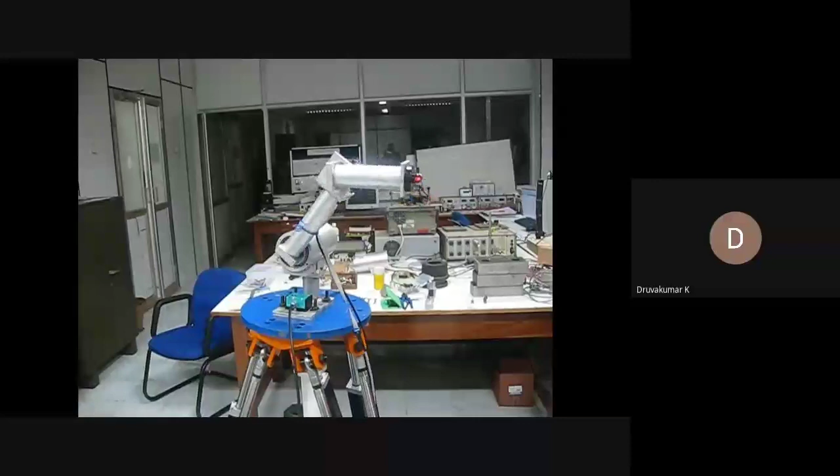Now we'll see this. You see? Visible, sir, but sound is muted for that one. Leave it, let's focus on sound. You'll see the top one, the medical robot, used for calibration. You are seeing the top robot kept on the parallel manipulator. We are seeing it, sir, it's visible, but sound is not coming, sir. Maybe you are muted there at the bottom, sir.

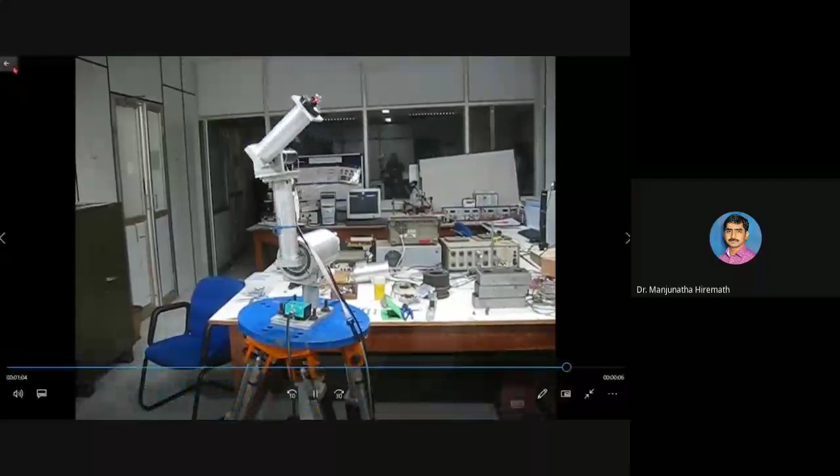System, you are muted, sir, I think. Yeah, Professor. Hello, yes sir, tell me sir. Sorry, I'm not able to. Sir, the video is visible. If audio is not coming for that video, that's okay, sir. No, because we want to see how that robotic thing is working. Exactly, you can explain, sir, while it is displaying. Yeah, one more thing, one minute.

Now you'll see the robots for obstacle avoidance. How it is, see now. You're seeing this? Visible, yes sir, visible sir. You'll see how it will place n number of obstacles and how it is avoiding them, it will not hit them.

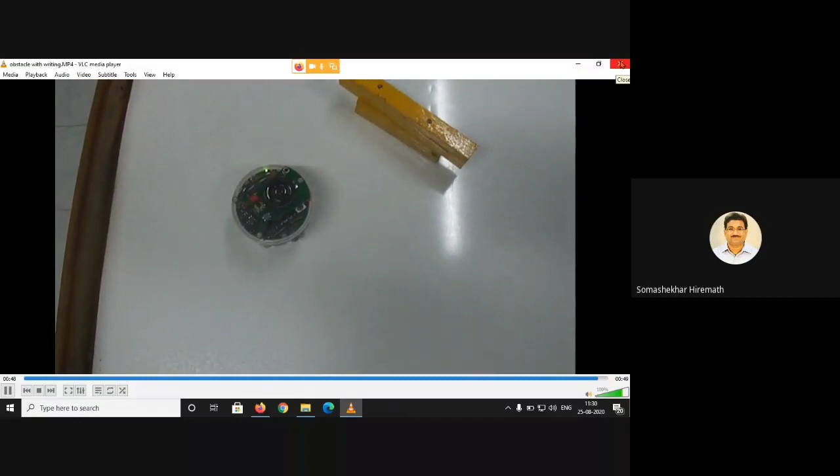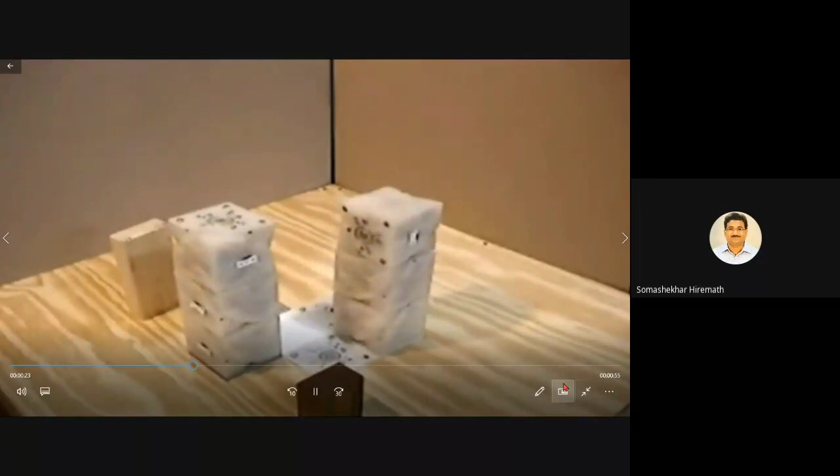Some of the robots I'll show you are self-reconfigurable robots. Similar type of work we are doing in our laboratory. You'll see this is visible, it is not in our laboratory, this is from Cornell University. You see this is visible? Yes sir, visible, visible. These are called building blocks. They will build themselves and do newer work. This is not from our university, it's from Cornell University.